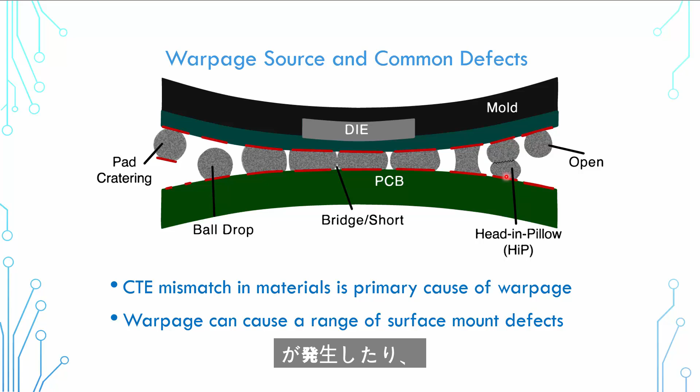So CTE is coefficient of thermal expansion. Something like a die in a package is going to expand at a lower rate than the mold and the substrate layers, and when those expand at different rates, you're going to get shape change in the vertical direction. And then when warpage and thermal warpage occurs, depending on when in the profile it happens, you can have these types of surface mount defects like an open or bridge, or something more subtle like a head-in-pillow where the sample may pass electrical tests but then fail later in the field.

Okay, so today we have a bare PCB setup in our AXP 2.0. As you can see here, you can see the PCB actually inside of our oven. You'll also be able to see it here on our screen. So the AXP 2.0, to do a quick equipment overview, we have our optics above, we have the oven here, we have motion systems on the sides, and all of our cooling mechanics are down below the tool.

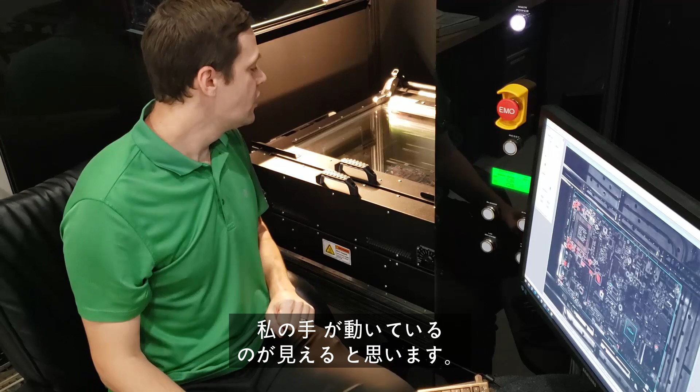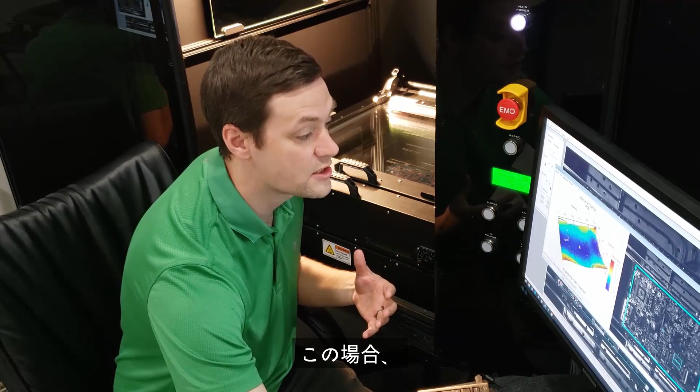So here on the screen, you will be able to see a live view of our actual PCB. You can see my hand moving there, and then if we quickly take an image, the patterns created by our shadow moiré technology are going to shift and give us a rendering of that PCB surface. In this case, I've taken the global warpage as well as looked at one local area on the board. All right, so we'll take a look at what this does as we heat it now.

All right, let's take a live look in here. I've made a temperature profile to use for this run. This is emulating a reflow profile, which is a common use of our tool. We also will recreate reliability profiles or really any thermal excursion that you want to create. But the system just took an image.

We're going up to reflow temperatures and capturing the shape of this board as it heats and will here soon cool. So we started around 600 microns. We're now near 1600 microns in shape, so the board is warping. We're hitting peak temperature now, and our cooling process will start as that occurs. You can hear the fans start to kick on. So we'll check on this as the profile ends.

All right, so our profile just ended. We got through a reflow process, took about 13 images through that. You can really take as many as you want. All of this is programmed in Akrometrix software. The input profile, this thermal profiling, and then the analysis package is really where a lot of the complexity and the meat and the value comes with warpage.

So here you have the excursion over temperature. You can see the board actually kind of popped and really changed on the cool down.

We're now at 2.8 millimeters or 2800 microns, so it actually drastically changed shape into kind of a potato chip. That does happen at times. And you can see the local area also started to get somewhat of a saddle shape as well. So all this data is saved. You can look at it live here in this software, but most often you're going to take the files that we just created and we'll go and we'll process it.

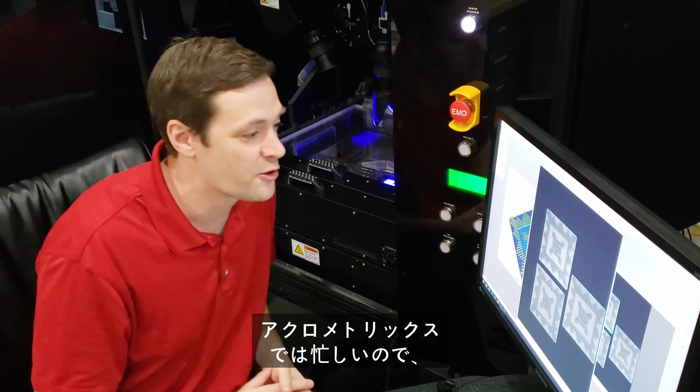So we can take a look at that after we take a look at the DFP technology, which we'll do right now. A little bit of movie magic here. We now have the DFP inside the system. We also have a wardrobe change because we're busy here at Akrometrix and your customers do call. So now with the DFP in, I'm going to take a quick measurement with that.

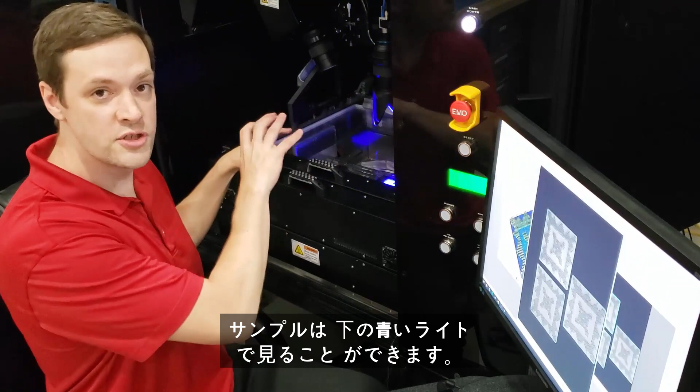The DFP setup is also inside of our AXP2. Instead of using the optics above for shadow moiré, we've taken out the grating. We have a projector and camera inside. This takes about 10 minutes to do this actual swap, as with most of our modules. So the projection light you can see with my hand, maybe there in blue, the camera above, and you can somewhat see the samples down in there with the blue light.

Our acquisition cycle is only about a second with DFP. It's quite fast. In this case, it's going to take a little bit longer to process because it's more data. That's one of the advantages of DFP. But what you get here, I have an actual balled BGA, and you're actually going to get the solder balls. And we'll look at this later and how you might process this data, because as it is, it's not that usable. I mean, it's cool looking, but what do you do with that information? We need to do something with it besides saying, hey, that's 620 microns of warpage.

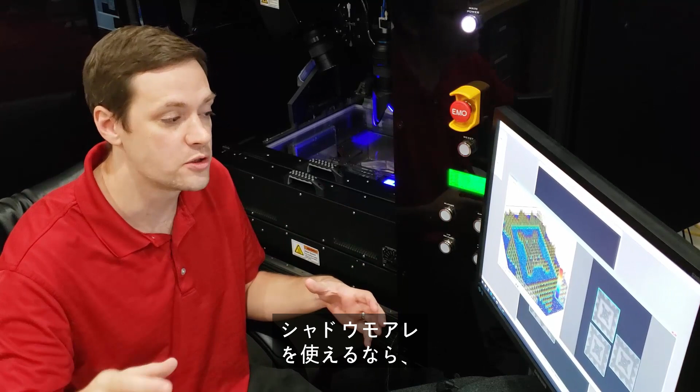So this is an application where we use DFP. We can make a whole video on DFP versus shadow moiré. The short version is shadow moiré is very robust. It's very accurate across a wide range. If you can use shadow moiré, you generally want to. If you have discontinuous surfaces, sudden height change, a connector, things like that, a balled BGA, DFP is going to be your better answer. It handles the step heights and it has better data density to it, but it's a projector, so if you zoom that projector out, which you can here, that accuracy is generally going to get worse as the projection gets larger.

So we'll look more at processing now. How do we take this data and work with it? Now that we've seen the system in action, let's take a quick look at the software that really drives all of this functionality. So we'll start here with the Profile Generator software. This is the software to create an input temperature profile to pass to the other softwares and have the oven and cooling systems emulate your real world conditions.

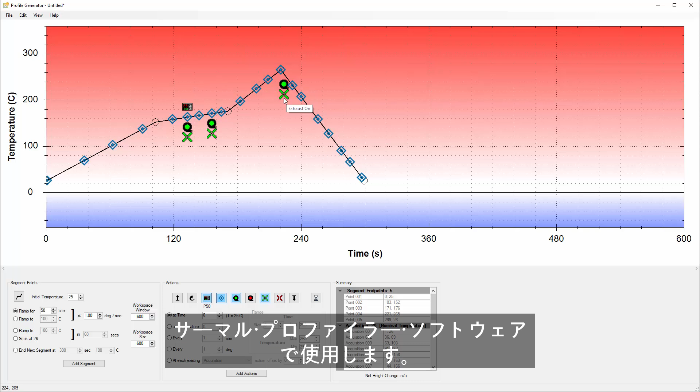So this is a profile in time and temperature in the Y dimension where you can really time it out however you wish. Add in actual acquisitions that you want to take, as well as different cooling functions. You can add in different thermal commands. There's a wide range of actions that the system can automate and reproduce with this software. So we'll take the file from Profile Generator, and then we're going to use it next in the Thermal Profiler software.

The next step in the software is surface measurement. This is where you're going to come in, you're actually going to interface with the equipment, where you take your measurements, you set up your tests, and you control the different system variables. You can also do a lot of the processing steps up front or later in surface analysis, as we'll show.

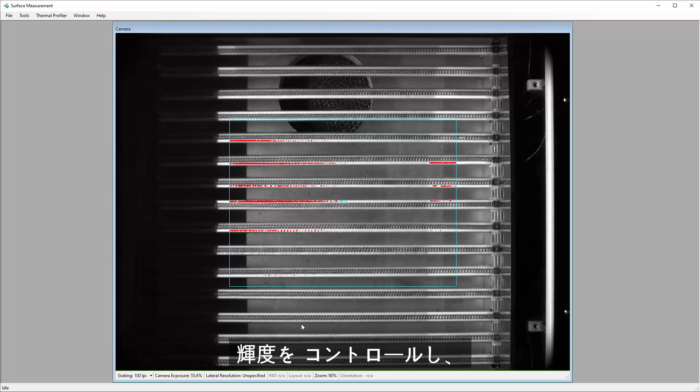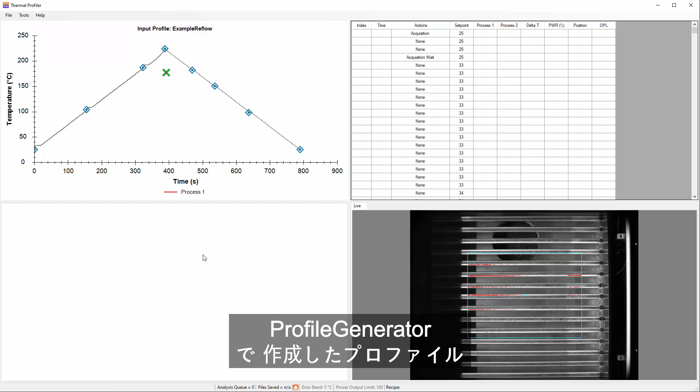So you'll control brightness, get your test set up, and then if you want to run over temperature, similarly you're going to have an interface with Thermal Profiler. Now you've already seen this with the live equipment. You saw me using these two softwares, so I'll keep this brief, but essentially you load in the profile that we create in Profile Generator. You see the tabular data as it goes. You get a live view of the sample, and then your results will start to form below.

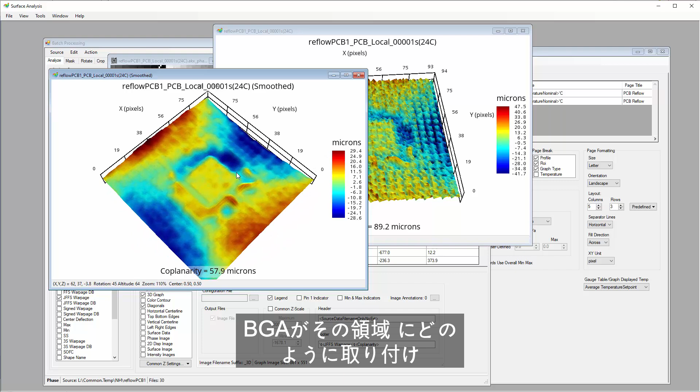Alright, so we have our data now, and we can bring that into surface analysis. This is the major analysis package where we can look at all the data that we took. So I have just a single example here of our local PCB area. We can take a quick rendering. We can look at it closely. There's a lot of surface roughness, so we can come in and smooth that. That's probably a better representation of how a BGA would attach to that area.

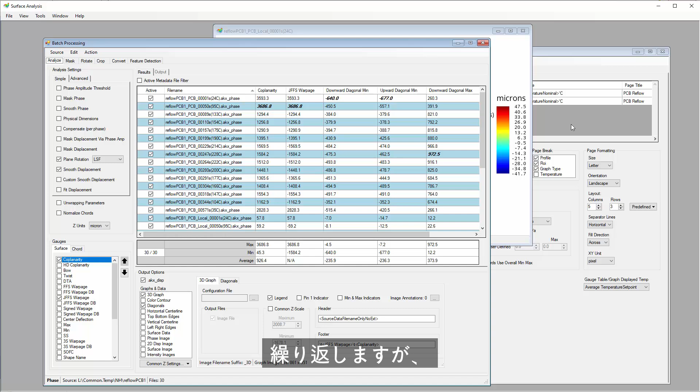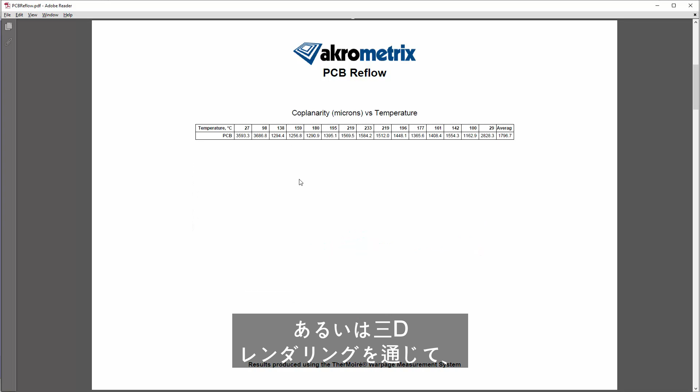And at the end of the day, you're going to take those files that were created and you're going to batch process them and then look at essentially reports, so statistical information. So batch processing interface, there's a lot to see here. Again, this is not an explanation of how the tool is used. You load in the files and then kind of a reporting interface, so you can create at the end of the day a report to look through and see what this board did over temperature, either through gauge information and statistics or through 3D renderings to show you kind of what happened.

You can do gauge plots, local areas. We can look at the PCB local, as we did before, get diagonals of that. That's what a lot of your output at the end of the day is going to be. And this can be done on very, very large quantities of data and then looked at statistically as well.

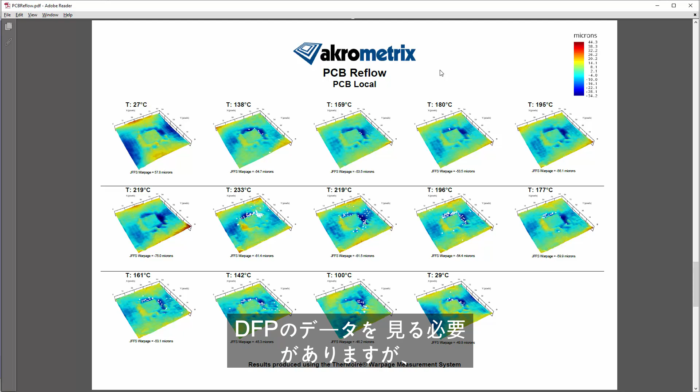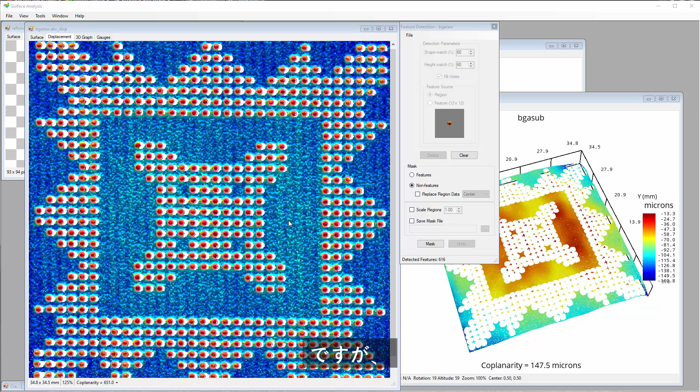So we still need to look at our DFP data, and we'll also look at how you might compare these two data sets together. Going back into surface analysis now, so here's our DFP data from our BGA, and we've actually used a function called feature detection to locate these balls in space. As we discussed, the BGA with balls, while it is an interesting data set, if you're going to look at it for warpage, the balls are really going to be almost all of your height.

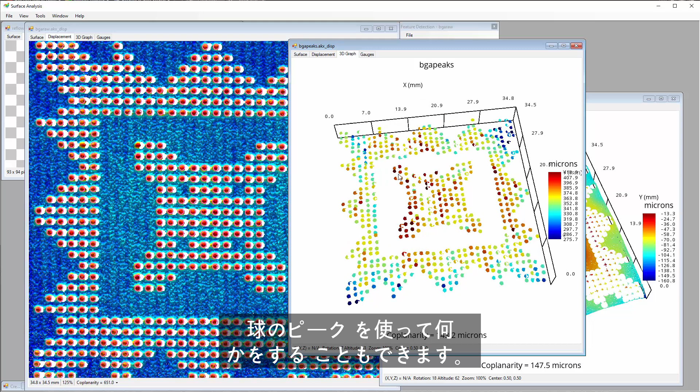So this is a software we've built in, and I won't show the full use, that's used to automatically locate those balls, and then we could exclude them from the data set and get just the substrate data, kind of as you see here in the underlying substrate. Or we could do something with the ball peaks, in this case, like actually pulling out the highest point of each individual sphere and plotting that.

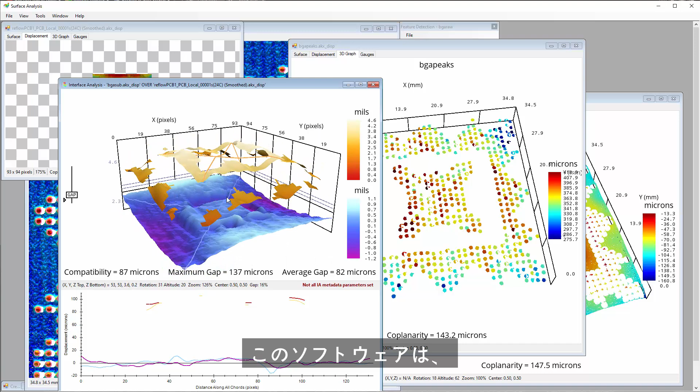If we want to compare these data sets, we can also do that within the software. Say we want to look at the PCB and compare it to the BGA substrate. That can be done in interface analysis, and this is a software that's actually kind of being overhauled right now. You see there's actually a version of it within surface analysis. This used to be, or traditionally was, a separate application.

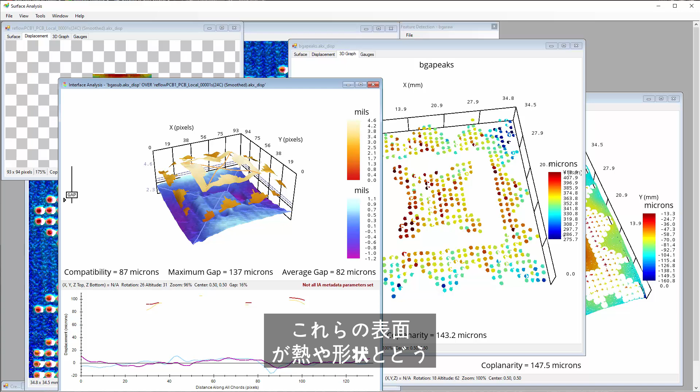But this is really the more important data at the end of the day, is how these gaps are between these two attaching surfaces, and then what might happen to them as temperature changes. So these variables are really critical for your warpage analysis, for attachment of your packages, over temperature, and how these surfaces will interact with heat and shape.